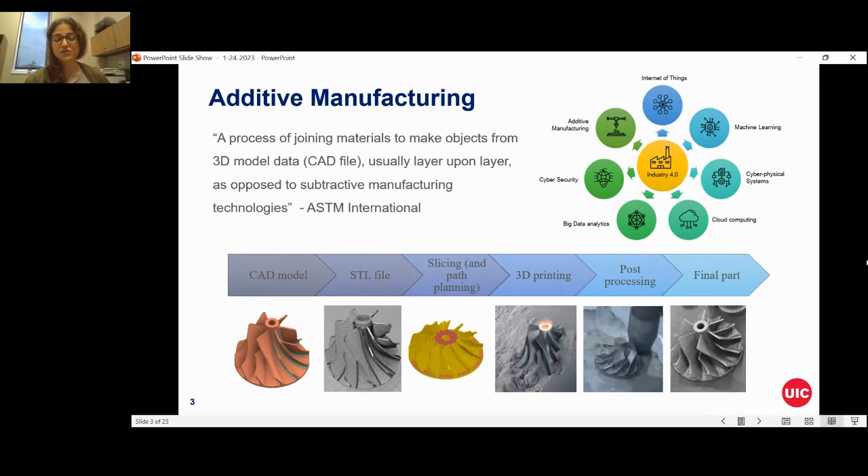So just an overview of additive manufacturing. I'm sure all of you are familiar with this technology. So it has created disruptive possibilities, both in terms of new products and new innovation in the materials, etc. So in terms of its evolution, we have seen that recently additive manufacturing has been adopted as functional products in critical industries. So it's getting distance from its first applications as prototypes.

And as a result, ensuring that the final product quality or the part quality is satisfactory has become much more critical than ever before. However, this is actually the portion that additive manufacturing is kind of lacking. So there has been a lot of research going on to try to address the quality challenges.

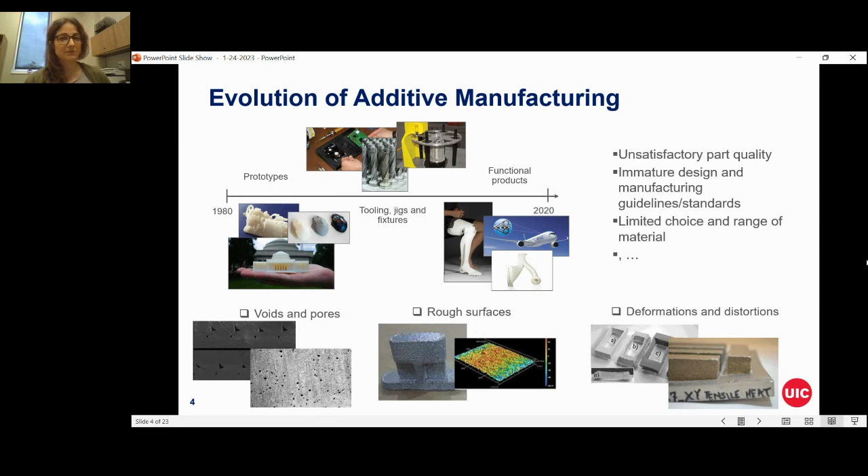Now, in many of the additive manufacturing processes where the bonding or the fusion of material is thermally induced, we actually face a lot of challenges for the quality, like the voids or pores, the roughness of the surfaces, or deformations and distortions that are caused by the frequent thermal cycles. So how to formulate this thermal signature and thermal history has become the key in controlling the quality issues in those types of additive manufacturing techniques like laser powder bed fusion or even fused filament fabrication process. So from the research point, there are several directions.

However, physics-based or model-based approaches generally have some limitations with respect to capturing the variations and uncertainties of the process. So they're generally deterministic in nature and cannot really address the variations or uncertainty or stochastic nature of many manufacturing processes, including additive manufacturing. In terms of computation, they're generally expensive. So the majority of the studies we see in the literature are limited, for example, to single tracks or small sample sizes, thin walls, or simple geometries. And as a result, it's really hard to scale them or generalize them to different geometries or processes. And for real-time decision-making applications, which is generally where we're heading for additive manufacturing and smart additive manufacturing, they're less practical.

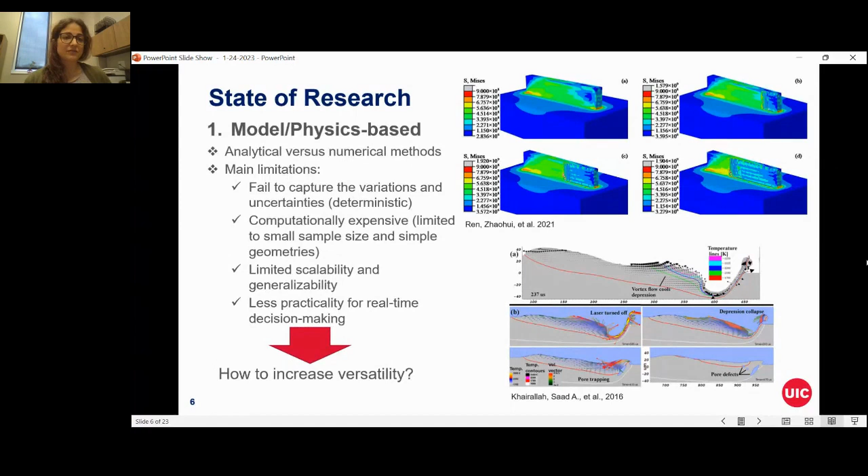Now, the question would be how to increase the versatility of these approaches and basically address the limitations that they have. So another direction of research uses data-driven machine learning-based approaches to formulate thermal signature. And of course, again, these approaches have a lot of different advantages, but have also challenges and limitations on the side.

The main challenge they have is that they require massive data sets. And in most cases, these data sets need to also be labeled, which is time consuming. The data acquisition pre-processing also is very costly and time consuming. And there are always a lot of outliers or noisy data that need to be handled or pre-processed accordingly, which adds to the complexity of the process.

We have high dimensional data in most cases, and also multimodal data. So we might get, for example, image data, video data, time series, or scatter measurements. So how to fuse this information together and how to extract valuable information from these different data sources is becoming challenging. And most importantly, data-driven machine learning-based approaches are really hard to interpret.

So in terms of transparency, they're not really useful for manufacturing decision making. In other words, it's really hard to understand why the machine has made such a decision. So that kind of logic, which is generally derived by some physical phenomena, is lacking by these approaches. And that would be really hard for manufacturers and decision makers to interpret the system that way.

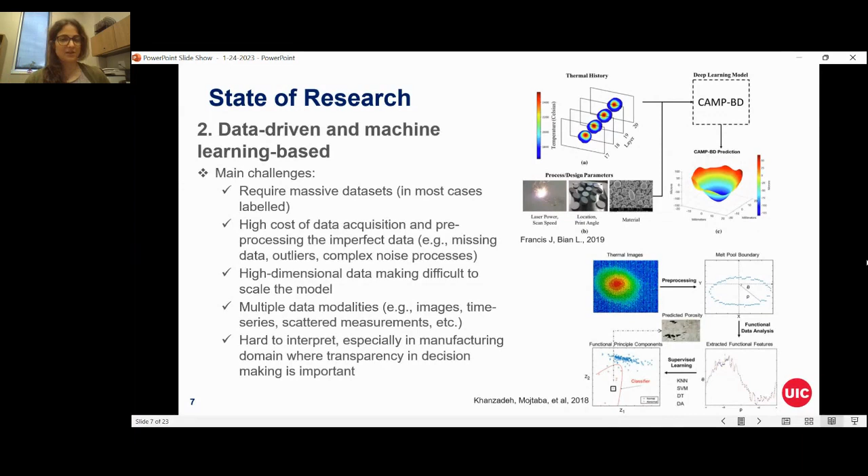So the question that the researchers are trying to address is, can we integrate both physics-based and data-driven approaches? Is there a way to leverage the benefits and advantages of both of them? And the answer to that is yes. So I think until year 2020, there have been so many efforts in the literature, especially in the field of additive manufacturing, where people are trying to not fully integrate, but combine data-driven approaches with physics-based approaches. So I call these methodologies hybrid methods.

So recently, I think since 2019, 2020, we have seen a surge of interest in publications where people are now trying to go beyond hybrid methods and to figure out ways to truly integrate physics domain and physical information and domain knowledge into the machine learning and data-driven algorithms. And there are different ways that people do that, and I will talk about it in future slides. But the reason for this surge of interest has been the unique application domain of additive manufacturing.

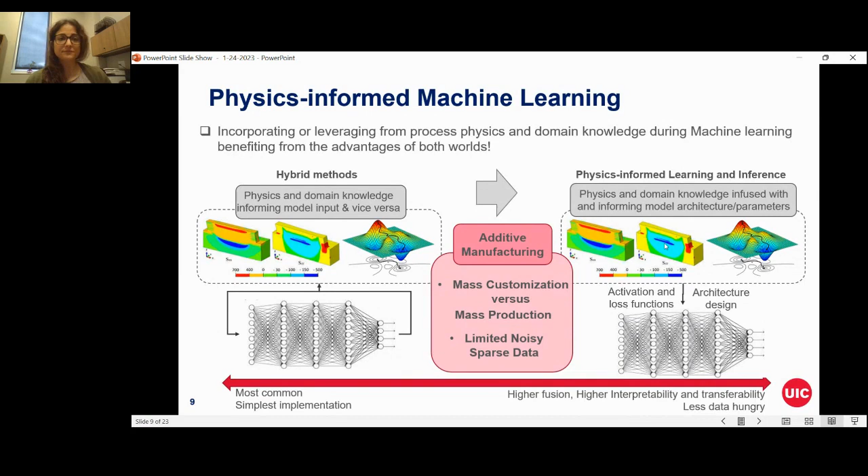So there are a lot of challenges with those, and as a result, if we can really integrate the physical models and the data-driven models beyond what hybrid methods do, we might be able to address these specific challenges. So this is just an example of how hybrid methods work. So hybrid methods, as I said, are performed in a sequence. So this is one of the studies we had in our group.

So if we can, for example, characterize this distribution well, then we can also have an understanding of how the part will perform at different local regions in terms of mechanical properties.

And of course, one way is to use theoretical models like numerical simulations, and also Newtonian sintering, like a model for formulating the bonding between the extruded filaments. However, we noticed that using this approach by itself, which is just entirely physics-based, has limitations because it doesn't capture some physical phenomena.

For example, there would be some filament or bead deformation caused by creep or stress or, for example, gravity. So how to incorporate that deformation to increase the prediction accuracy, that's what we try to address. And for that purpose, we trained a neural network that could characterize that deformation, and then we incorporated that deformation into this physical model to enhance the prediction accuracy and also update the void boundaries.

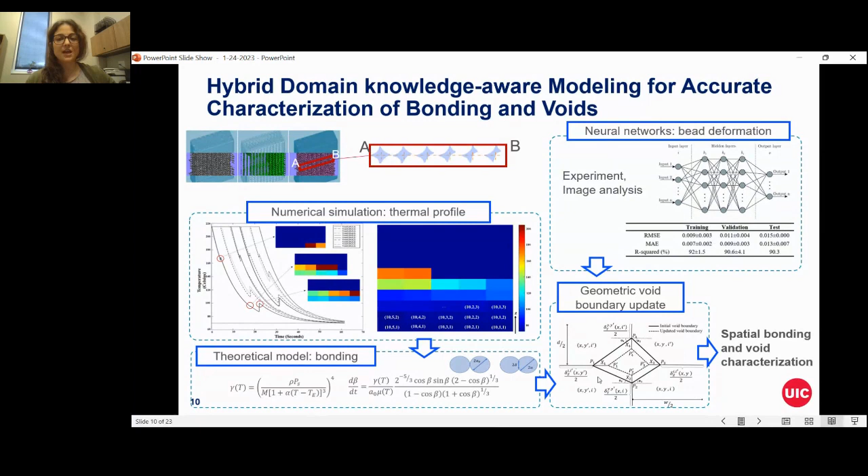Now, we want to go one step beyond that. We want to see how to truly integrate physical knowledge into machine learning and data-driven algorithms. And there are different ways that people generally use in the literature. I would say that the most frequently observed approach that I've seen in the literature is loss function augmentation. And I will talk about that. But before I talk about loss function augmentation, I want you to look at input feature engineering.

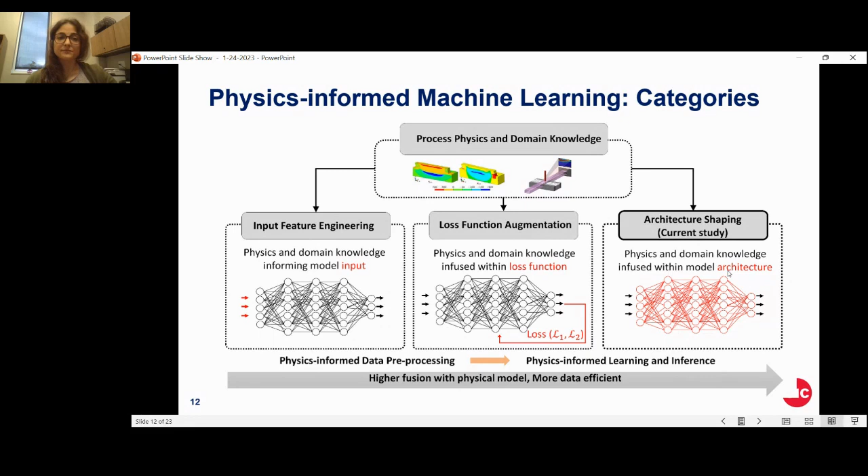I will talk about this loss function in the next slide, but before I go through that, I want to say that in our group, we also proposed a different way of infusing physical knowledge into machine learning algorithms, what I call architecture shaping, which is on the right. So instead of trying to incorporate the physical knowledge into the loss function or some parameters of the neural network or machine learning algorithm, we try to shape its architecture according to the process physics or the domain knowledge that we have. So before I talk about our approach, loss function augmentation, as I said, is the most common approach that has been used in the literature.

And as I said, the loss function, as you can see here. So the loss function basically allows you to make sure that the model is fitting the data very well, and then you can get as close as the actual observations in terms of the results for the predictions.

So the loss function augmentation methodology tells you that you can incorporate additional terms or add additional terms to the original loss function of your network. And this additional term that you're adding actually could be based on some experimental observation or some theoretical physical knowledge or constraints that you already have.

So let me give you an example. So let's say you know from physical experience that parameter X and the outcome of your observation, like the tensile strength of the part and the input process parameter X. So let's say process parameter X and the output is tensile strength. So let's say you already know based on some experiments that these are positively correlated. So if one goes up, for example, in terms of value, the other theoretically should also go upward.

So if you have that domain knowledge or that physical insight, it's very easy to incorporate it into the loss function. So if, for example, the X value goes up and you have a model that, after X goes up, predicts a Y that actually goes downward, so in the opposite direction, and you know from experiment that that shouldn't be happening, what you can do is easily incorporate a penalty term into the loss function here.

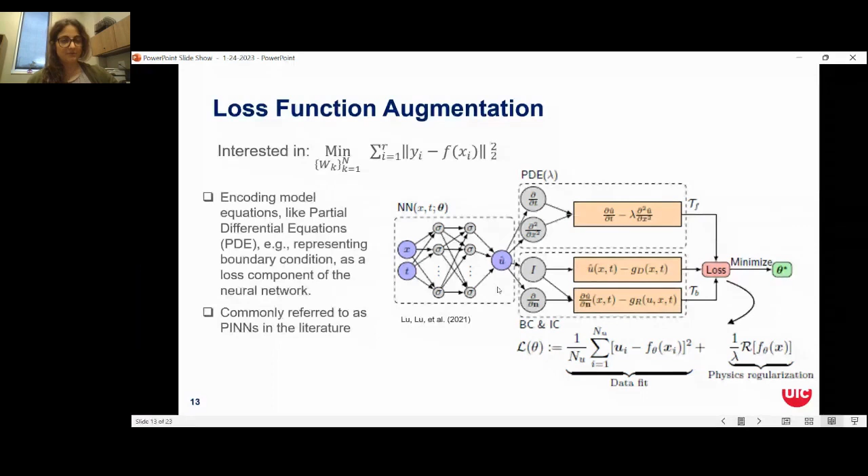And the traditional loss function augmentation methodology that we've seen in the literature is also commonly known as PINNs. I'm sure you have heard of them, PINNs. So they use loss function augmentation to make the neural network physics informed, and they're really good for solving partial differential equations. But we came up with a different methodology for making our network physics informed, and that's by basically manipulating and shaping the architecture of the network. So the methodology we use, we call it architecture-driven physics informed deep learning.

So what it does is that it relies on an iterative function or inference model. So why is it good for thermal history prediction? Because thermal history, we know, is iterative in nature and it's like a time series. So for example, the temperature at time t+1 is a function of the temperature at time t, and that function is generally a nonlinear function that we theoretically know. And there are some parameters associated with that, for example, defining the conduction, convection, and radiation, depending on the material properties and all that, right? So we know that the temperatures are related in a cyclic way.

So if we know that iterative connection, then what we can do is unfold or map each of those time iterations to a layer of a deep network. So then each of those iterations in time would represent one layer, and the weights of the layer, which are used for training and fitting the model, will be mapped to the parameters of the model, the coefficients of the physical model. So now they will become interpretable.

They have a meaning. When you optimize the network, the weights by themselves don't have a meaning, but if you map them to the coefficients of a model, for example the coefficients for conductivity of this specific material, then you can actually interpret the model. And also the connections of the layers come from the physical model in this approach. So you can see that you will end up with networks that are not fully connected. So if a connection does not exist based on the physical knowledge that I have, then I'm not going to add it in my network.

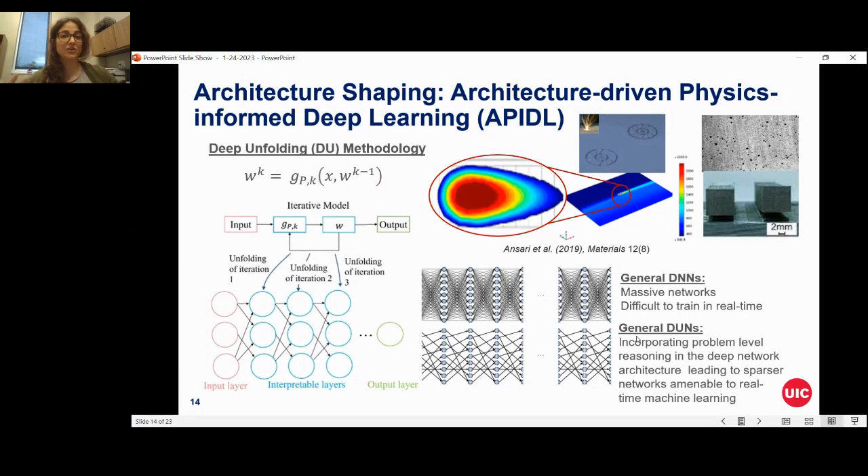And that actually saves a lot of time and computation cost. And the sparse network that has been created here also makes it very suitable for training when you have limited data available. So I'm going to skip the APIDL structure and move to the case study.

So of course, we wanted to check whether our methodology works. And we actually worked together with some of my collaborators at Argonne and also Iowa State University. And we had a single track experiment, and we tested the predictions of our model with experimental data. And as you can see, they match pretty well.

So there are some inconsistencies in these regions where the temperature goes above a specific limit. And we believe that in terms of physical phenomena, something's happening that our original physical model is not capturing. So our hypothesis is that by incorporating that information into the physical model, we can actually capture these regions as well, the changes that are happening in this region.

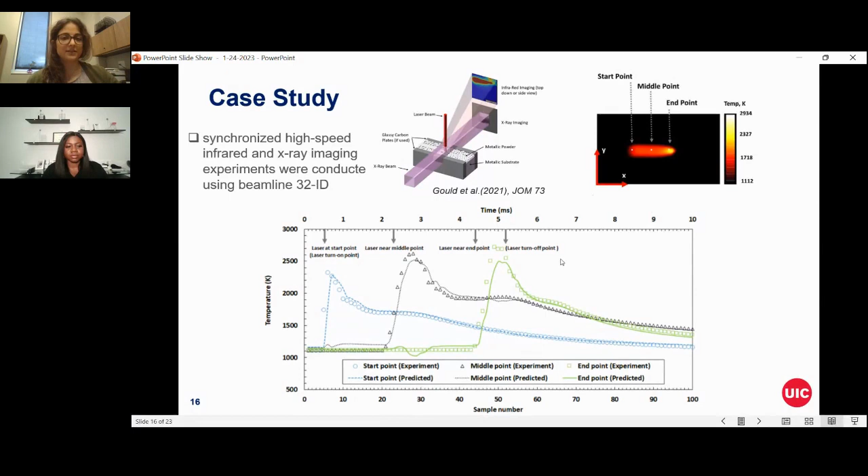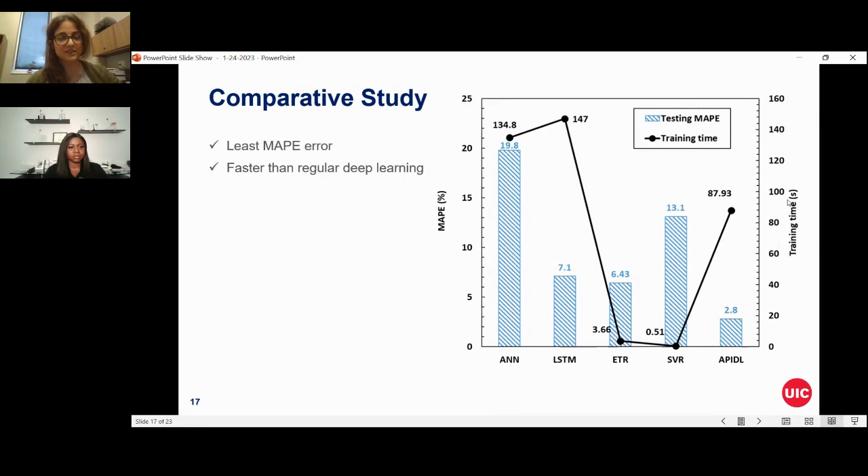And we also compared the APIDL model with some existing models in the literature, mostly data-driven. And you can see that on the right is our approach. In terms of the error, it is much, much lower than the other methods. In terms of computation time, it's still much better than deep learning, which is fully connected networks. But of course, some other models still outperform it a little bit. But still, in terms of training time, it's within a matter of seconds or just 1 minute or something, which is still good for real-time monitoring and control.

Now, the last question I want to talk about is, basically the title of this talk talked about data efficient learning, right? So we wanted to see whether APIDL is truly data efficient, because of the sparse network that it has. So we wanted to see how much of the training data would be enough for our APIDL model to get a reasonable level of accuracy in predictions. And what we did is we reduced the training data significantly and compared it, of course, with the two best methods from the previous slide.

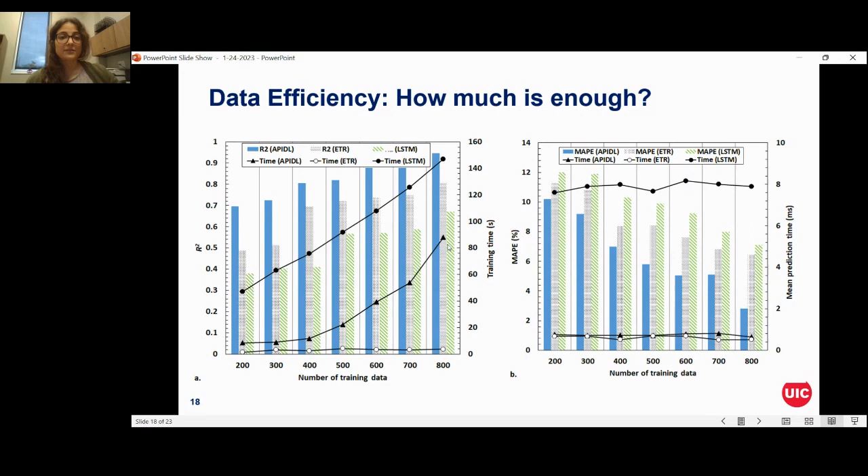And the hypothesis was that as we move to the regions where the data becomes really scarce and very limited, the gap between the performance of our method and other methods should increase, meaning that this physics-informed methodology works really, really well when data is limited and not abundant. Yes, the experimental results all approved this hypothesis. And we're so excited to actually continue exploring the application of this methodology.

So to conclude, this talk mentioned that it's possible to merge physics-based models and deep learning models in many ways. Examples include feature engineering inputs, modifying the components, and modifying the architecture, which is what we do in our research group. And I honestly believe physics-based deep learning models will play a significant role in AM-enabled mass customization scenarios for fast certification and qualification of the products, especially when we have limited data, and we will definitely observe a surge of interest and publications in the coming years.